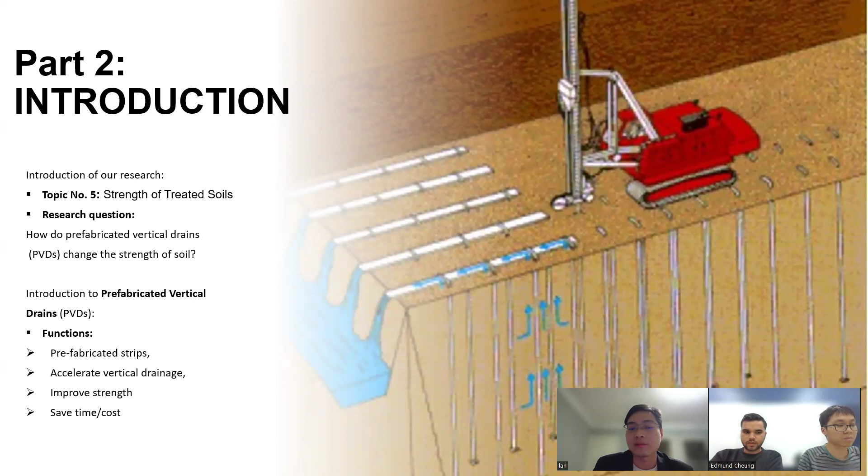Next part. Okay. By looking at those reference materials, we get some results. These are some of the main highlights from some of the projects here, such as the Istanbul project and Singapore project. The consolidation is prolonged by 705 days, and in the Singapore project 140 million meters of PVD has been used.

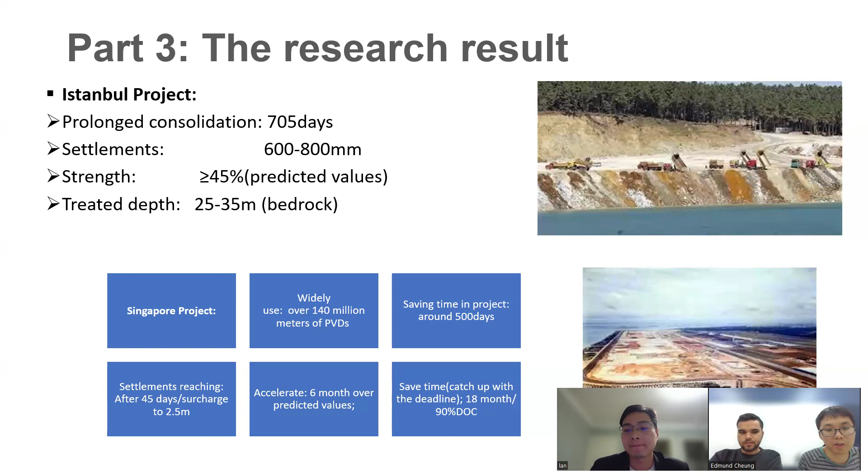Okay, to get a closer glimpse of the actual effects of the PVD, the Singaporean research team installed some detectors to monitor the settlement and instruments to measure the excess pore pressure. This is the settlement. It shows that the time to reach maximum settlement with PVD installed is much less compared to those without. So it shows that PVD actually accelerates drainage.

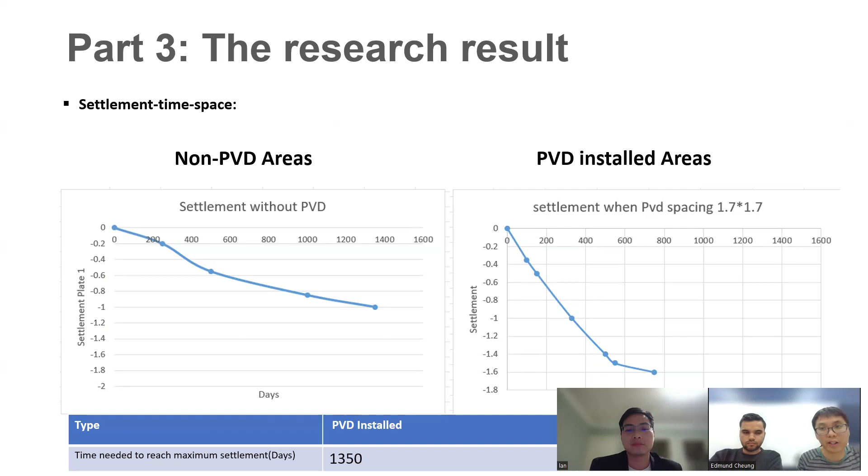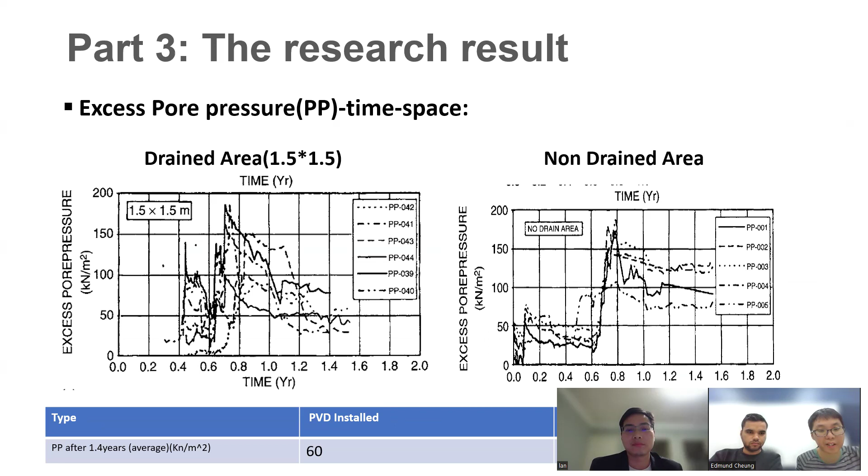And also to verify this effect, we also measure the pore pressure. So it shows that if PVD is installed, the pressure also decreases after 1.4 years by 50 kilonewtons per square meter.

And also we want to check whether PVD actually increases the shear strength. In this project, they used the field vane shear test, and we found out that the shear strength before reclamation is 17.5 on average. And after improvement, it goes to 47. It's quite a remarkable increase.

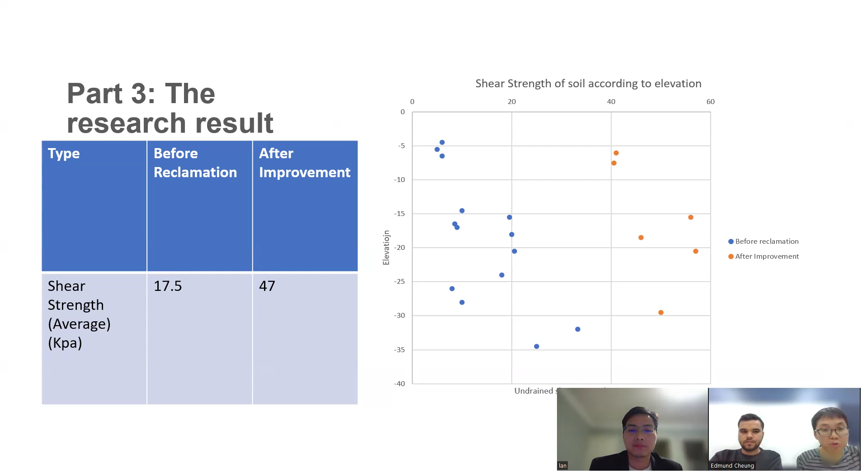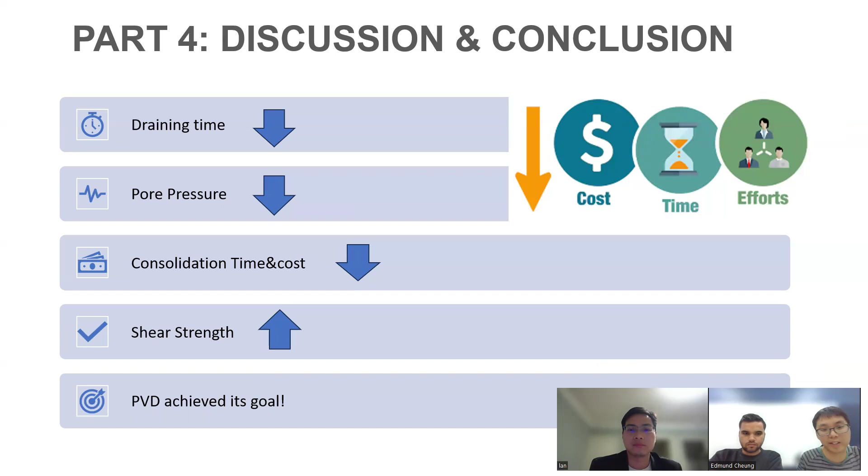So in conclusion, it all confirms what we have just assumed, and also it shows that the consolidation process has been accelerated, so the time and cost of doing so is decreasing. So we believe that the PVD has achieved its goal.

Next, my name is Aman. I will discuss part 5, where to verify the results, we did some experimental design. So we compared a few different types of soil, which are soft clay, normal sand, and sea sand. The different parameters that we considered during the experiments were what type of PVD it is, the spacing between the pipes, the preload, the strain level, and the value in percentage.

So for soft clay, the type of PVD that is used is basically the flat strip drains or the wick drains. The spacing that we need to keep between the PVD pipes is from 1 to 2 meters. A preload of around 2 to 4 tons per square meter is often used in the soft clay PVDs. And talking about the strain level, the strain observed is around 1 to 5% during the consolidation.

Talking about the fine sand, the type of PVD commonly used is the vertical drains. The spacing of PVD pipes is between 2 to 3 meters, and the load capacity is around 1 to 3 tons per square meter. The strain level may be observed around 0.1 to 1%.

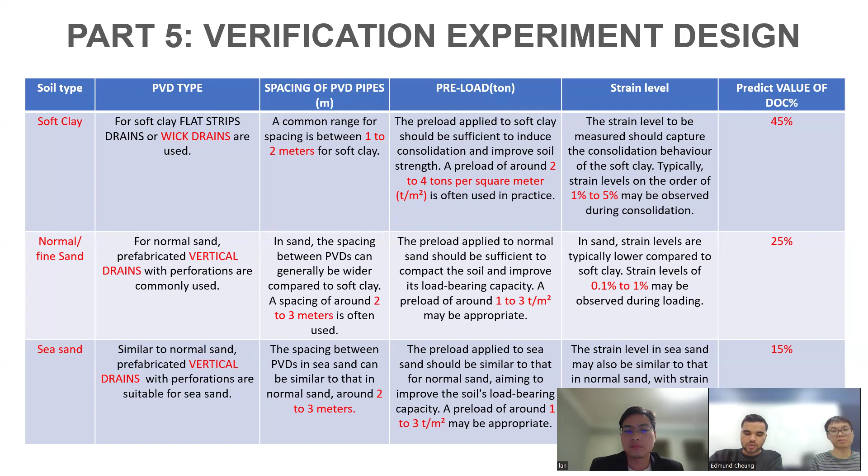The sea sand is similar to the normal sand or the fine sand. The vertical drains are used. The spacing is also between 2 to 3 meters. The preload is around 1 to 3 tons per square meter, similar to the normal or fine sands. And the strain level is also observed from 0.1 to 1% during the loading. Next part will be explained by Ian.

Yeah. From part 5, the verification experiment design for the PVD, the effectiveness or efficiency of drainage. I will divide it into 5 points. First is the efficiency of drainage, which is divided into 3 types of vertical drains. First is the wick drain strips, and second is the vertical drains, which are mostly used in our engineering applications. That can reach around 30 to 45, sometimes more than our design prediction.

The second is about the material properties factor. The E value and other values will be higher from the fine and normal sand to the sea sand. The third predictive result is the efficiency and spacing of the PVD strip. When we think about the spacing of 1 to 2 meters, it will be more effective than 2 to 3 meters for the drainage.

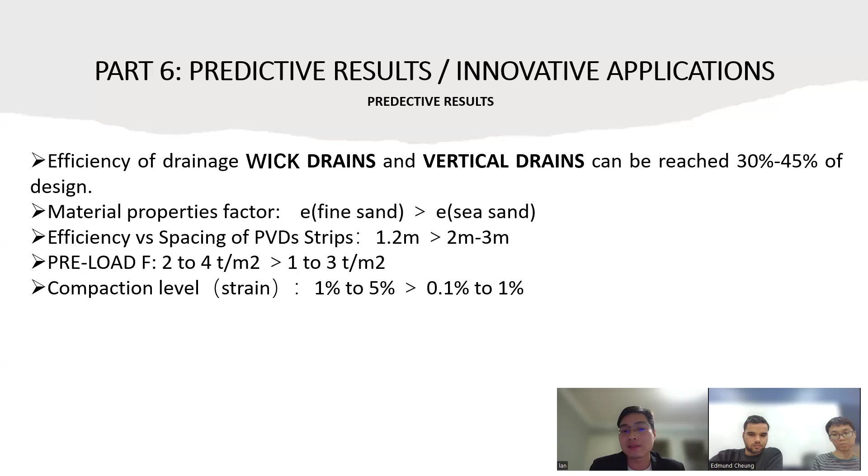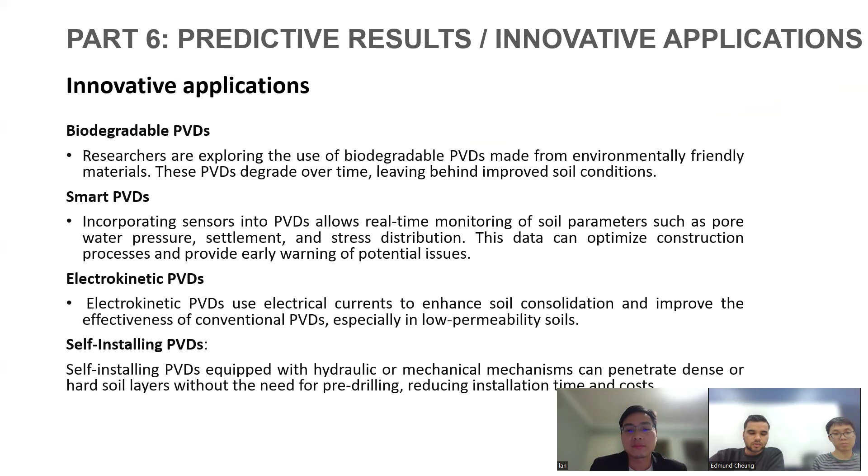The next part is the innovative application, what types of PVDs we can use according to the situation and the site. The PVDs are biodegradable PVDs, smart PVDs, electrokinetic PVDs, and self-installing PVDs. The type of PVD can be chosen according to the standards or the criteria that match the sites.